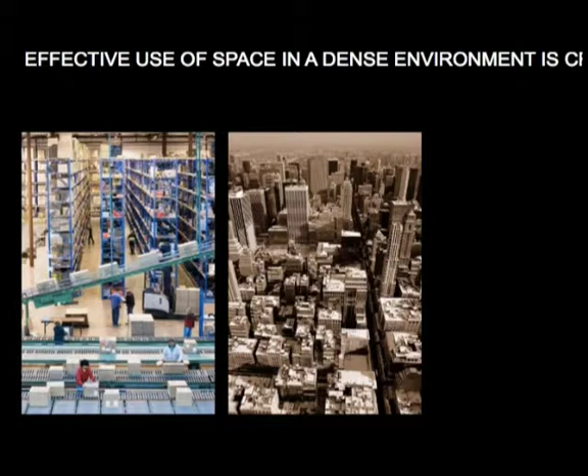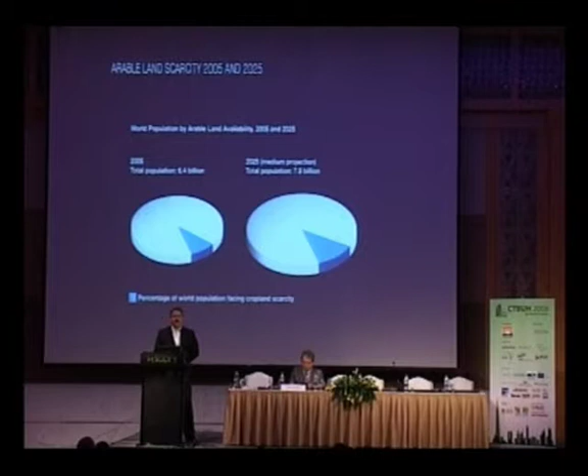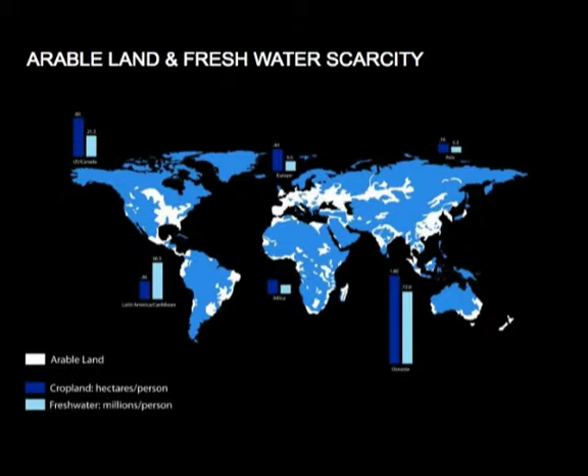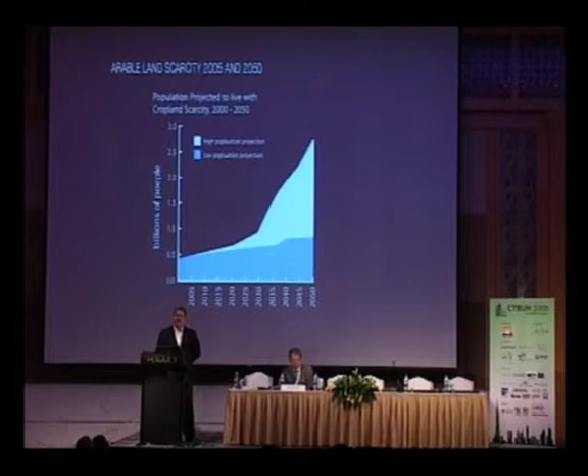The other thing we seem to forget is we basically need the land we have right now, arable land, to feed ourselves. We don't have enough. I suppose we could all stop eating cows and become vegetarians, but that's unlikely to happen. So the reality is we're facing a real dilemma in basic terms of arable land, and that's scarcity. All these graphs really do is prove to you that I've actually studied this and there's some truth in what I'm saying. Arable land will become a major issue and will drive the creation of more dense, taller buildings.

The other thing I've brought along are these interesting diagrams done by NASA. They're a collection of data that includes not only population densities, but traffic movements and transactions, pathological behavior—all that stuff built into these little models.

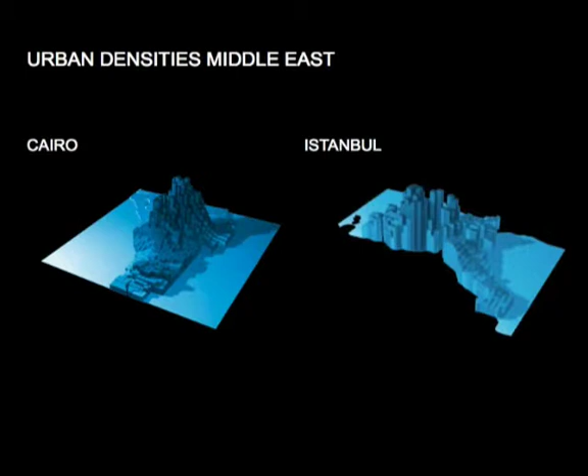You can see in Europe, fairly low density, but we get here into the Middle East and start to see extraordinary densities. In the United States, a little less consistent, but in Asia, unavoidably, some serious densities we're going to deal with. For me, these start to reflect the kind of architecture and the story of these places, because we think this is as much about storytelling, history, and placemaking as about sustainability.

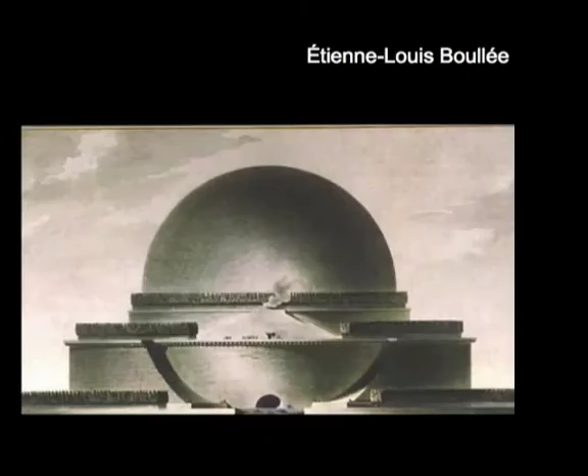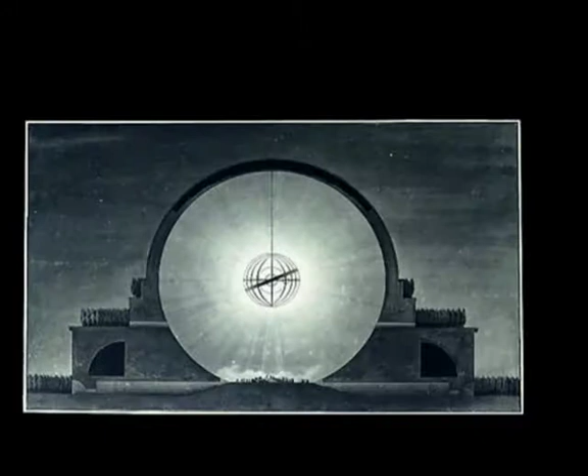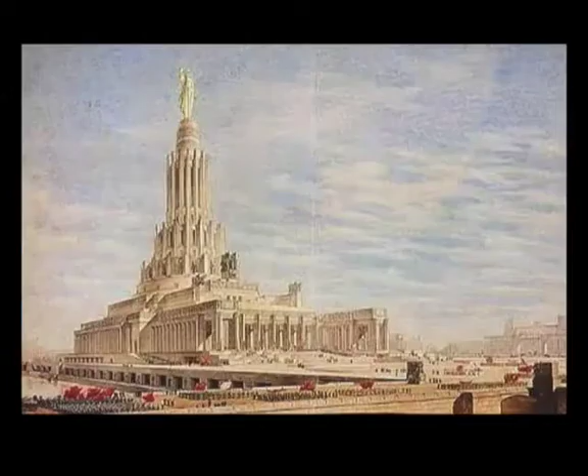This guy is one of my favorites—this is about the 1750s, and I'm sure you can see the scale of this building. This was a cenotaph to Newton that he designed, obviously unbuildable at that point, some 400 meters tall. This guy, although probably many of you didn't know, was an aspiring architect himself. But his first move was to tear down that beautiful cathedral on the left, and in its place he planned to build that. Now, that was to rival the Empire State Building, to be taller, to be grander—an expression of aspiration, not of necessity.

The reality is they didn't really know how to build this, so after they tore the cathedral down, the site flooded, and Stalin, in his wisdom, decided to make the world's largest swimming pool, which in fact they did. But it was a very shallow pool, because Stalin was a very short man. The irony is they then rebuilt the cathedral, and that's in fact where Boris Yeltsin was laid to rest.

So, aspiration, absolutely — nothing to do with sustainability or economics. And then one of my other favorite guys, just by way of a little history: his aspiration was to cover Manhattan with a 1,000-foot-high dome. Why? To make it more sustainable, to control the air quality, to actually make it a more sustainable place. Obviously, a little bit beyond his technological wherewithal as well.

But the ultimate story for aspiration is this building. This building inspired stories — we heard about King Kong this morning. It inspired romance, Beauty and the Beast. It brought some new thinking about workplace practices and what we would do in the workplace. It certainly brought some technology.

The building was built in 1931. It was built at the height of the Depression. It was built in 15 months — I'd like to see us repeat that exercise. But clearly it was about the aspiration of New York City to plant itself on the world's map as the leading place of commerce. Again, nothing to do with commerciality or desire.

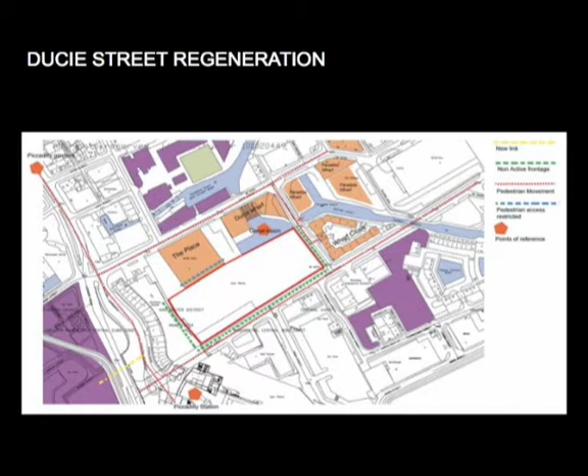So the first place we're going to start is in Manchester, England, which is a city experiencing extraordinary regeneration following an IRA bombing, really, that set off the plan for what we see there now. It really is a laboratory for regeneration and projects. We happen to be involved at a site — frankly, it's an old parking lot, an old rail yard next to Piccadilly Station — but as an urban design exercise, completely connected.

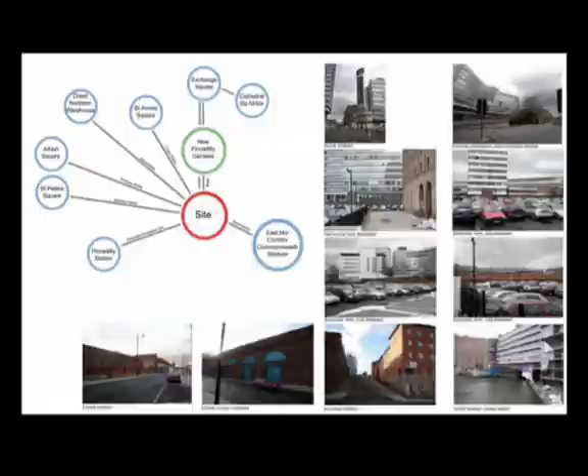So the site, and these little circles you see, are the connectivity into the city. We tend to do a pattern diagram like this, just to look for the clues and the rumors the history of the city offers us. And you know, most of our stuff starts with a little scribbly sketch like this — the Rosetta Stone that unlocks the development for our commercial interests, our clients, but also looks at how we're going to connect to the city.

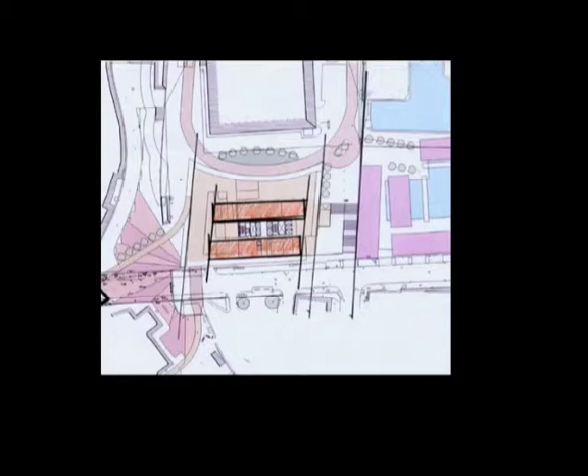Some little scribbles, and then ultimately starting to look now at the connection, in this case, to the third busiest railway station in Europe, which is Manchester's Piccadilly Station, and you see the connection there.

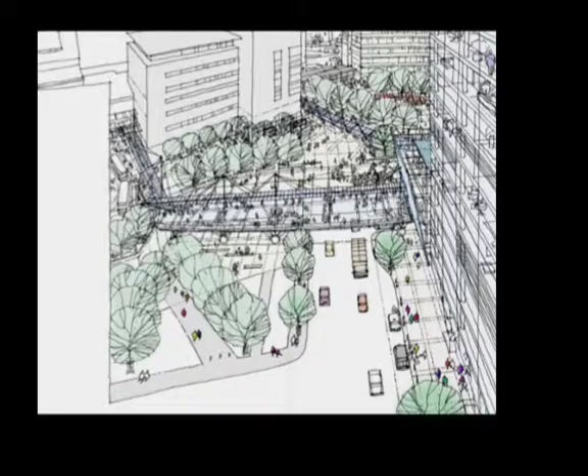Now, we like to use hand-drawn stuff because it's evocative, and again, I think we're talking about tall buildings, but tall buildings have to be about the place they're in — they have to be about connecting to the transport they're next to, and they have to be about placemaking. So we always start with these kinds of drawings to understand how we're going to connect and be part of the urban fabric we live in, and some of the gestures here.

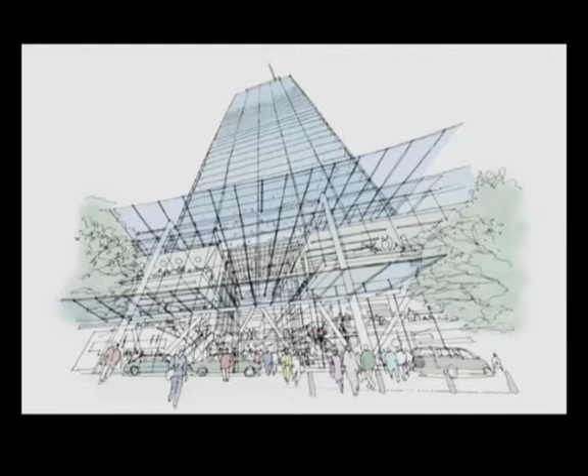We also believe that tall buildings need to come to ground in a recognizable way. I happen to be from Chicago, although after 20 years in London you can tell I now have an English accent — but they do this very well in Chicago, and that is that the entry to a building, you can feel the building come to ground. You can experience the height, the scale, the heroic nature of that building.

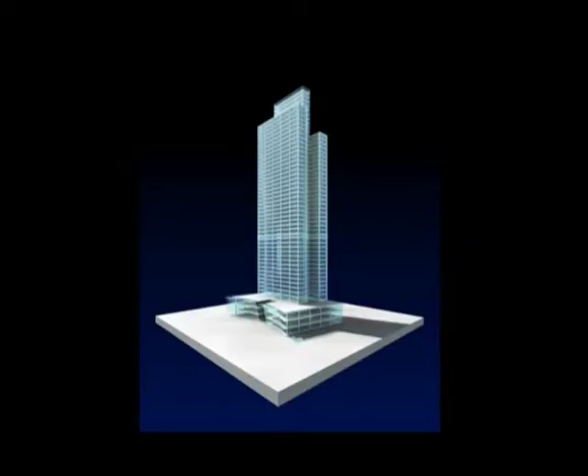And then obviously, again, some connectivity issues — this stair will rival in scale the Spanish Steps in Rome and will connect two quadrants of the city. Computer studies, lifting — somebody else can tell you about all that stuff. It's important.

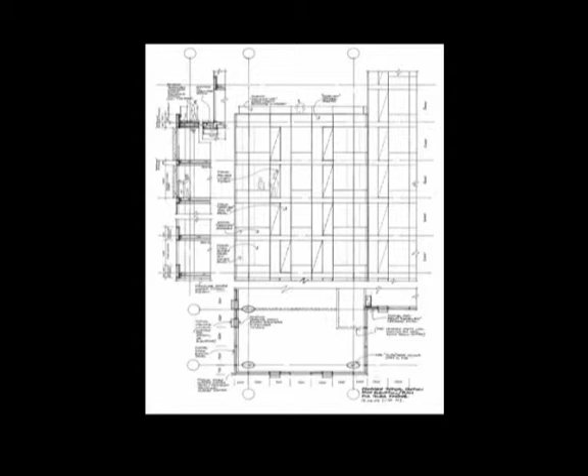One of the things we were interested in on the sustainable side was the notion of a 60-level building where every space, every bedroom, every hotel room, every dining room had an operable window. Now, that's a pretty novel idea in Europe, and certainly in the United States as well. So we came up with a system of pop-out windows so that every one of these windows is operable in every one of these spaces, and here's the imagery of how this building will look as it begins on site this past January.

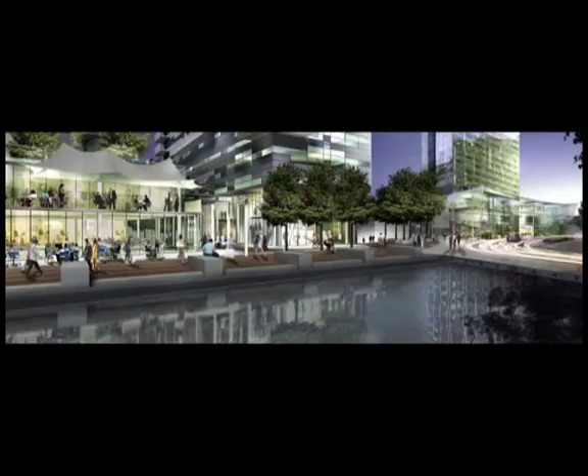So what do we get out of that? Well, we got Part L compliant. We got BREEAM excellent, all the good badges we want to wear for sustainability, but what we really got out of that is a wonderful urban design space that will work for Manchester, a canal at the base, the entry to the hotel, and how that building will take its place in the city.

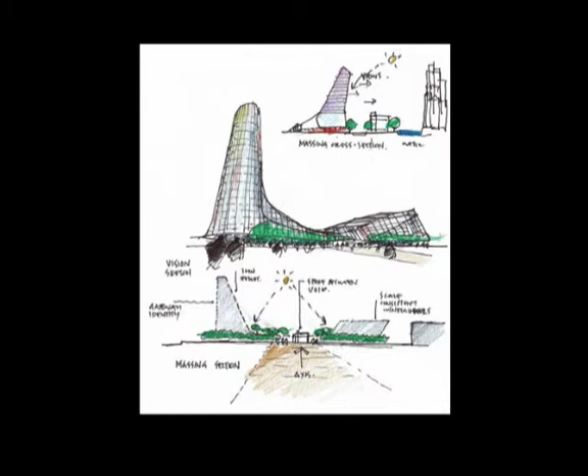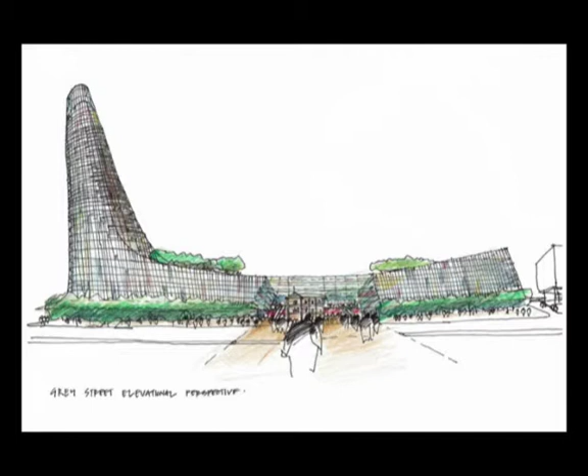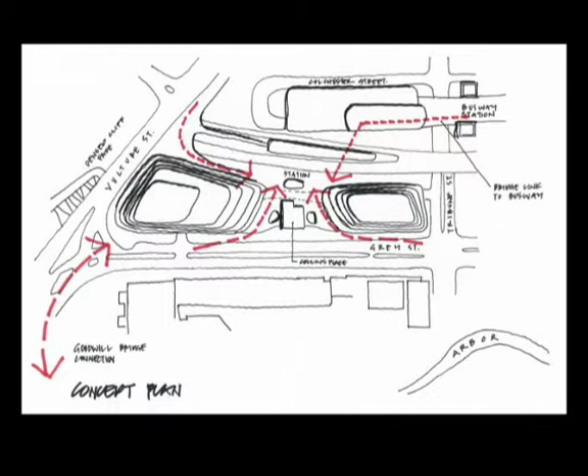Okay, next study, completely different, is about the dynamics of being next to a train station and honoring a historic building in the middle, and yes, we'll talk about sustainability as well. But really, this is about an urban design composition. You can see the train station and the train tracks as they run through the site. Right in the middle of this site is a little historic building, so our buildings are meant to clasp this or to reinforce the space between.

You see the kind of massing that we start to get with that historic building and the vocabulary of the building, which represents these trains racing by.

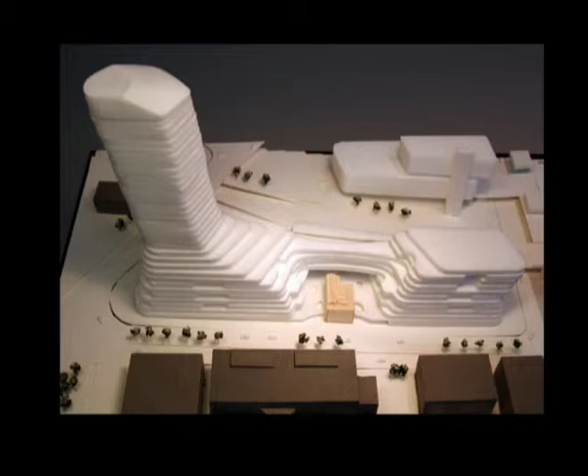Mixed use, again. One of the signatures of our practice is understanding how to stack uses, how to put office buildings with hotels on top, with residential on top, and how to mix those uses effectively. So we see the mixed use here. And what do we get for that?

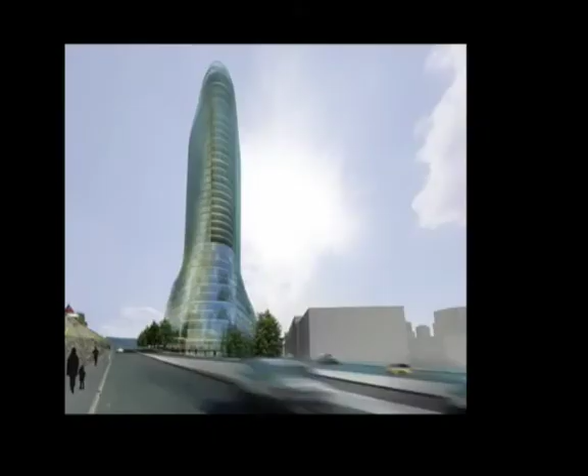Well, fortunately, we got a sustainable rating, or we wouldn't be talking about it here. We got a 5-star green rating and a LEED gold rating. But again, you can see the vocabulary of the building relates much differently to that train track as it races by the building and informs the architecture. And ultimately, the space that we create for people, where a tall building says this is a destination, and the ground plane that we get.

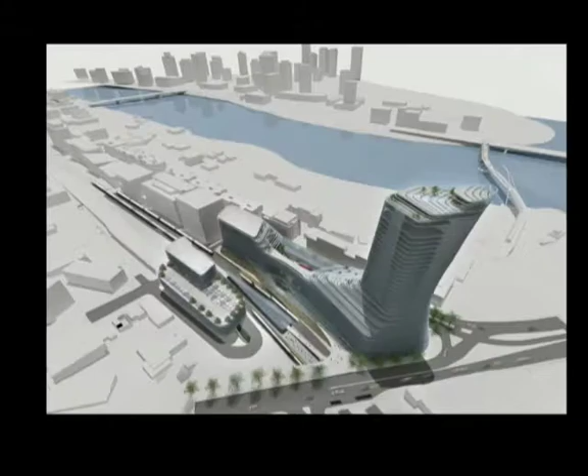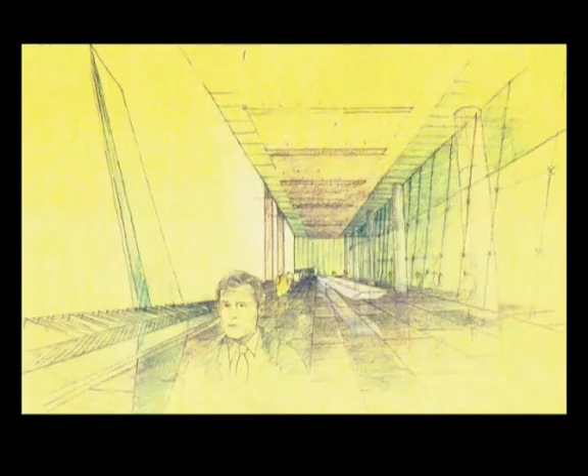Okay, we'll move now to Melbourne, Australia, and a very orthogonal grid, a very rectilinear grid informing an office building that we designed there. You can see, again, we start with the hand sketches. George visited us early in the scheme — he looks a little worried there to me already at that point, but he did visit. And again, the notion of that rectangular language informing this office building, and the idea that an office building doesn't need to be the same on all 4 sides.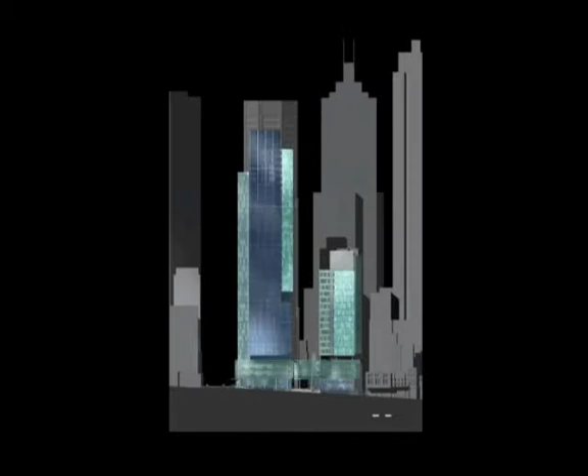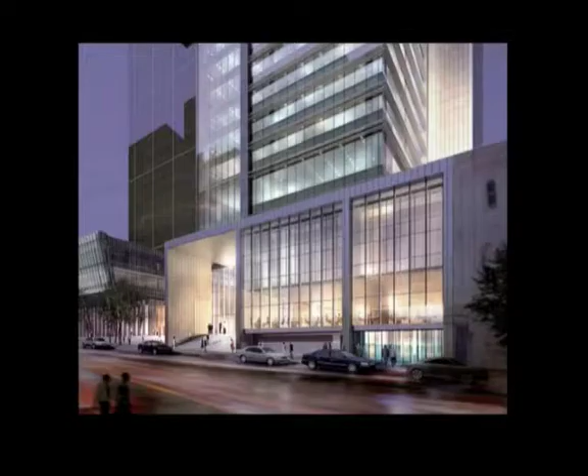Now, in most cities, we start to see this happening at this point in time, groundbreaking — the idea that all 4 sides might not be the same. And the reason for that is to handle the climate issues we deal with there and articulate the architecture. So you start to see these bars of building as they run up and down, and how that was articulated. But again, always thinking about the ground plane, always thinking about the public realm, always thinking what it's like for a 5'6" human being to move through the space around our building.

Ultimately, the environmental solution was very straightforward. On the hot face of the building, the image on my right, is just a simple thermal chimney that takes the heat off the building. That building is now there, and there's that little chimney that articulates it. And again, we were able to get a 5-star Green Star rating.

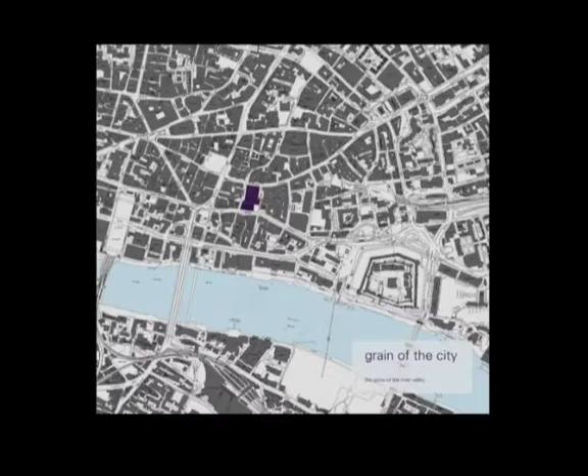This one's more about the story. Again, this is in the City of London, about the history of the place. I'd like to emphasize that sustainability and technology are important, but the story of a place, the history of its place, what informs our design, is equally important.

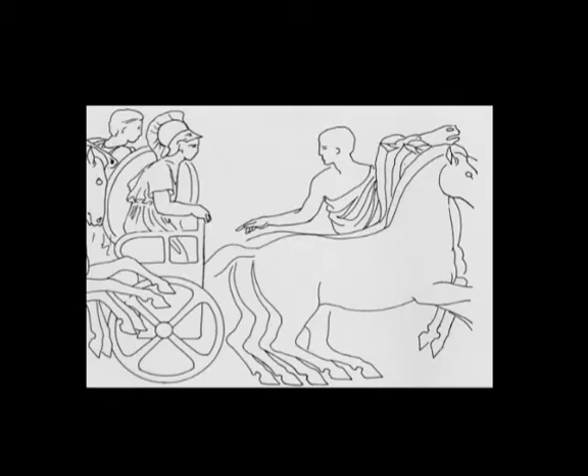The other thing we looked at were the Elgin marbles. Interestingly, the Elgin marbles take a static thing, an office building, a static square thing, and turn it dimensionally into something 3D. The little plan you see along the bottom is actually what you'd get from those carvings of those horses.

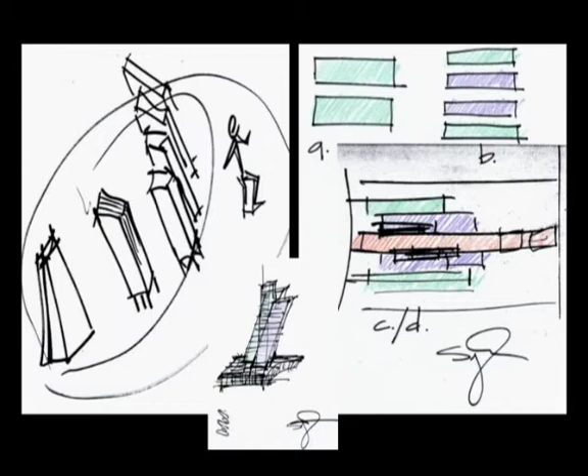If you look down in plan view, two things: the idea of putting a static building in motion, and the idea of layering even through a static idea. Some ugly scribbles to start us off, and then some beautiful computer models to look at how we might animate an otherwise static and square office building.

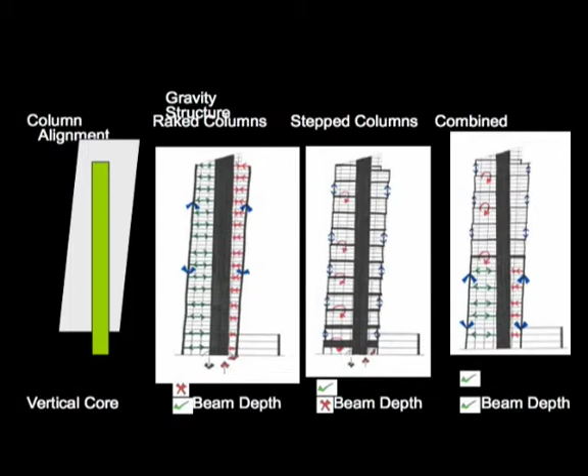But for us, how the building comes to ground in the city, how it meets the ground plane, and how people embrace the front door of that building is also very important. And how that building could look on the skyline in the City of London—again, the dynamics of a building in motion rather than a static building, and our addition to the skyline in the city.

London is changing, and you're going to start to see a skyline like that in London instead of the old one. Okay, last one, home stretch.

The idea behind this is the notion of holistic—really bringing all these factors into play. But most importantly, connecting that ground plane to what's important. Is that the 3-minute bell? Might be. So this is what we're about, these three goals.

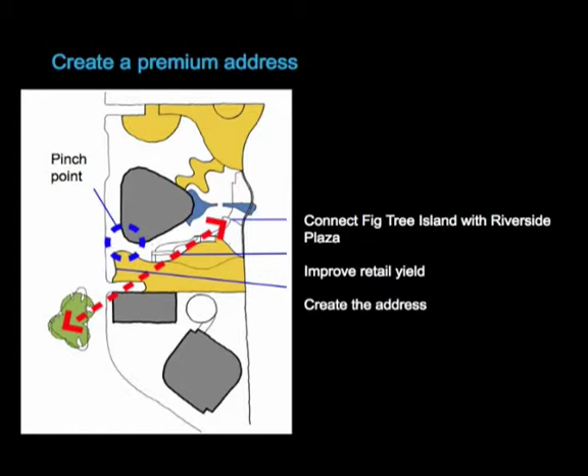I'll flip through these because these are basically about connecting a famous place in the city with its waterfront, creating a ground plane and creating a pedestrian realm, which is about making a place.

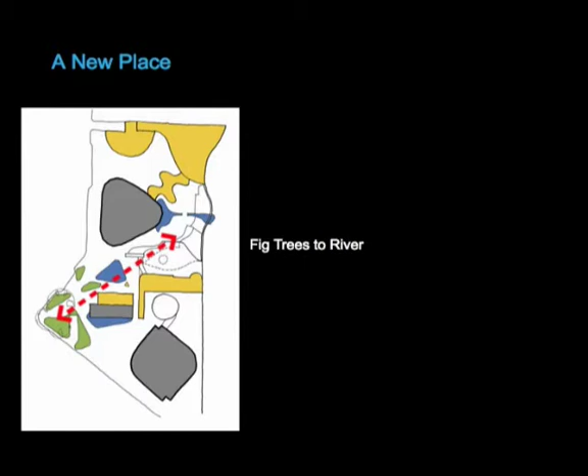Yes, there's going to be a tall building. Yes, it's going to be sustainable. But most importantly, the people of this city are going to be able to walk through this building and have a destination that they didn't have before. Again, the hand-drawn, evocative thing to help take us along and understand what we might be doing there.

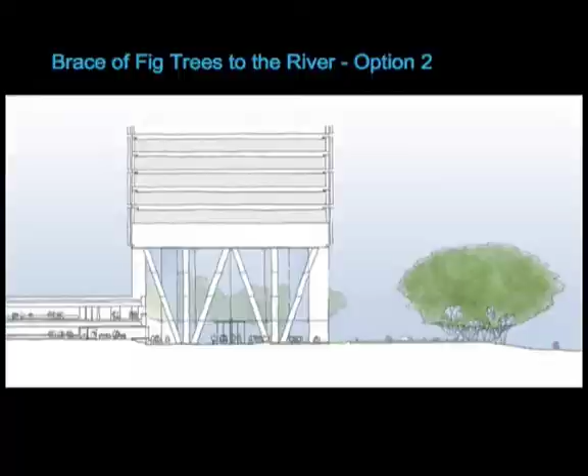How am I doing, Chief? Two minutes, okay. Again, the CGIs as well, but you can start to see the space that we're trying to create under this building. I'm going to gallop here.

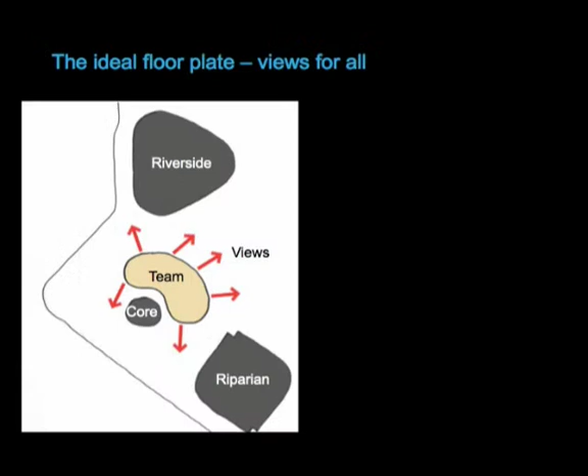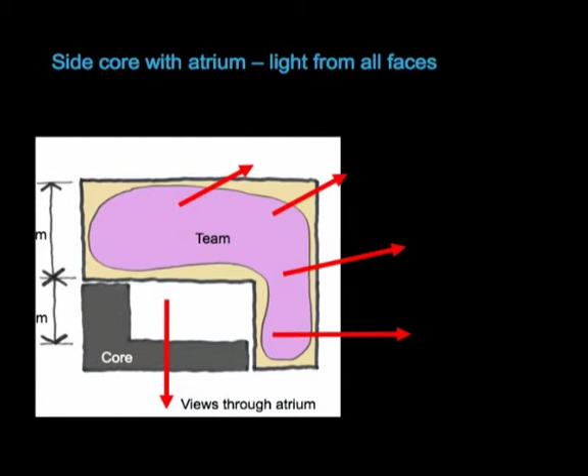The next thing we like to do is understand how the building works. This is an office building, so we want to understand how it works from the inside out. It's one of the things Woods Bagot brings—a range of expertise on these types of buildings. Some little diagrams start to look at how this thing might set itself up, and then floor plate efficiencies. This is the inside-out approach.

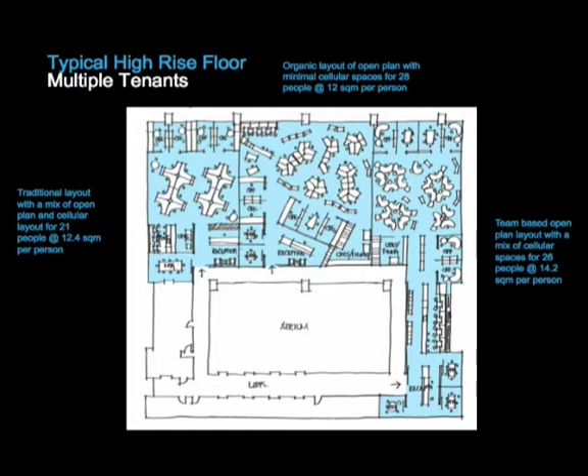We'll look at how people might actually work in that place. We hear a lot about tall buildings at this conference, these wonderful objects. I think for us it's absolutely essential that we remember not only people coming to these buildings at the base, but also how they're going to live and work in this space—that's critical.

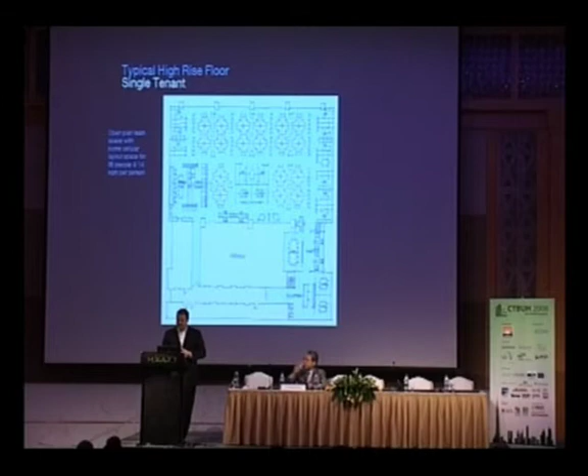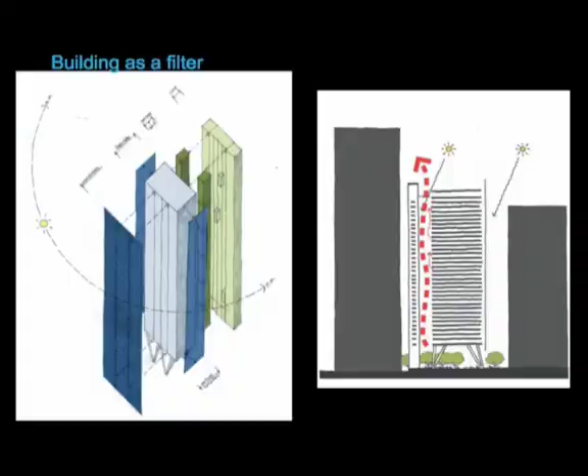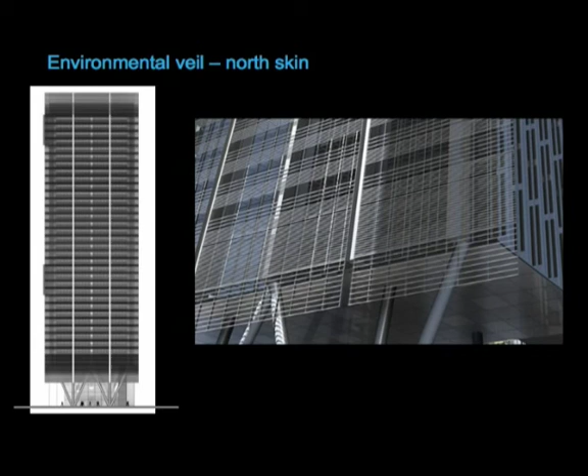And then finally I'll walk through the environmental side of this, looking at how we can make this an environmentally responsive building by creating an atrium—again, the thermal chimney, which is the way it works in these climates—a veil at the base of the space to protect that space, a different face of the building on a different elevation. We still see buildings that have a 360-degree uniform treatment.

And finally, the image of that building and how we intend it to be. I think my time's up. Thank you very much. Holistic—think holistic.